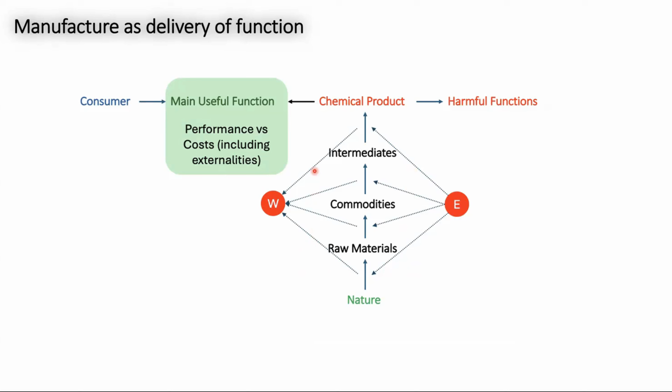And in recent years, the design vector, the set of target properties for manufacture, has significantly expanded. So this is a typical statement from a customer of what they want to have. For example, they want to make a new material with a particular property X, whatever that is. They want to make sure that there is no patent infringement. If this material goes into the end of life in the environment, it needs to be biodegradable, it needs to be non-toxic, easily manufacturable, having a low-cost starting material. Those materials should have a low environmental impact, and the overall process should be cost-effective.

This is a 7-dimensional design vector, which is really, really difficult to hit. And so the way we design materials these days, the way we manufacture them, is rapidly changing because of the need to hit a significantly more complex design specification for materials and molecules.

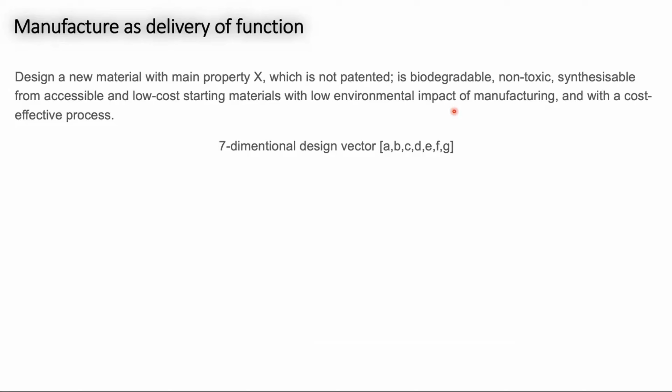We do manufacture in systems. The manufacturing plants are collections of unit operations. They are in specific order. They interact. And so what we have as a manufacturing process is a complex system. Because this is a complex system, those are quite difficult to create. And the degrees of freedom in the final manufacturing process are relatively few. What we note is that the globally optimal way of manufacturing is usually a sequence of suboptimal units. If we optimize each step individually and put them together, that doesn't work. We really have to optimize the whole system together.

And now, as we have this wider design vector for materials, our global optimization is now even bigger than just the operation. We also need to take into account the environmental impacts, the supply chain, and so on and so on. So this really is becoming harder.

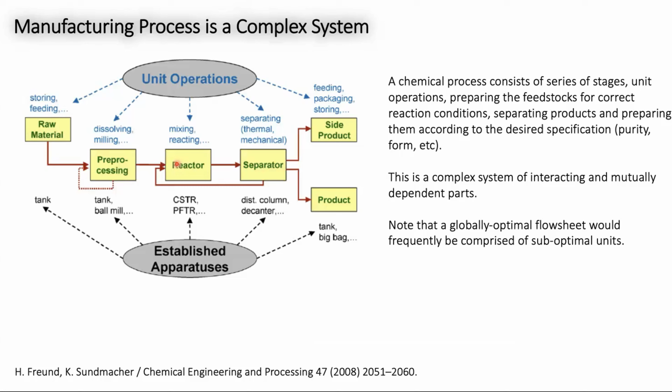And just to show you the last slide, which shows that this is difficult, is the scale and the dynamics of the process. So if we're looking just at the manufacture, we have a process. A process is a collection of units. Let's say we have a reactor underneath that. Within the reactor, we'll have certain phases. Each phase consists of molecules and consists of atoms. So we have this hierarchy of scale, and then it's also in time. So we go from the starting materials, which are placed into the plant, into the products.

The products are typically either materials, so phases, combination of phases, or a combination of phases and molecules. And then these are the products, and then in the use phase, we have this combination. So it's quite a large collection of different scales. And in order to cover the science of this, we cover a lot of different disciplines. So technically, this is not an easy task to put this together.

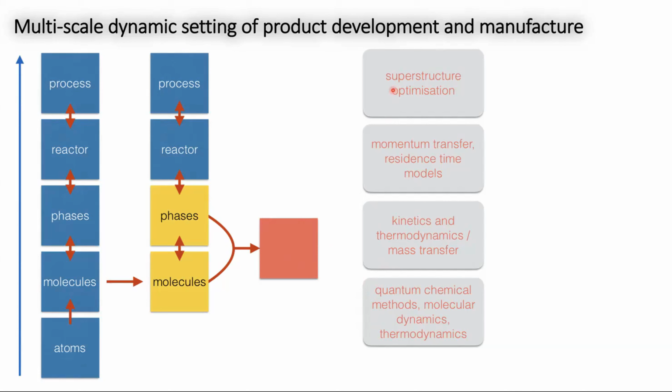So now we're talking about process design using new tools and then process manufacturing using emerging tools. So what we're trying to do is combining the knowledge about unit operations. So what do we know about this? What are the tasks? What's inside? What are the conditions? What's the physics and chemistry inside? To create a first principle model.

The first principle models are our summary of our understanding of what's going on. It may be slightly wrong, it may be simplified, but that's what we understand about what's there. It's a research tool, and the first principle models are also used in optimization and control. We can collect the operational data from the running of the plant, and then that gives us the statistical models, which can be used also in control and optimization. It also can lead to tasks such as anomaly detection, fault detection, and so on.

And then if we combine the first principle models and the link to the operational data through sensors and the feedback to the actuators in the plant, then we have our digital twin. And so in this case, we can start talking about digital laboratories, digital factories, tasks such as real-time optimization, predictive maintenance, anomaly detection, etc. So I'll show you how we build these things, how the technology evolves and what's under the hood in developing this type of technologies.

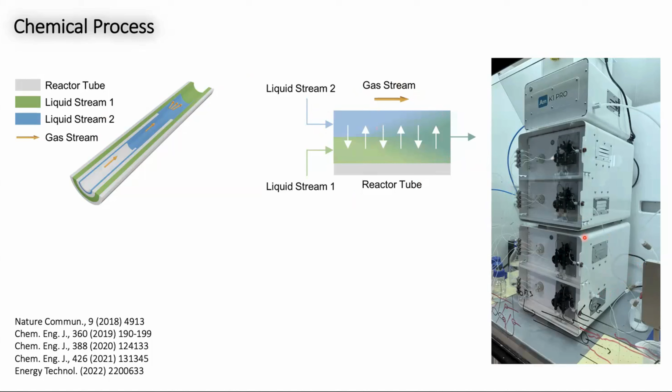Again, they're not very specific about what's going on. We can start picturing the phenomena which are in this process. And then we have the actual plants from which we can collect the data. So there's a lab plant with sensors, which we then can use to collect the information.

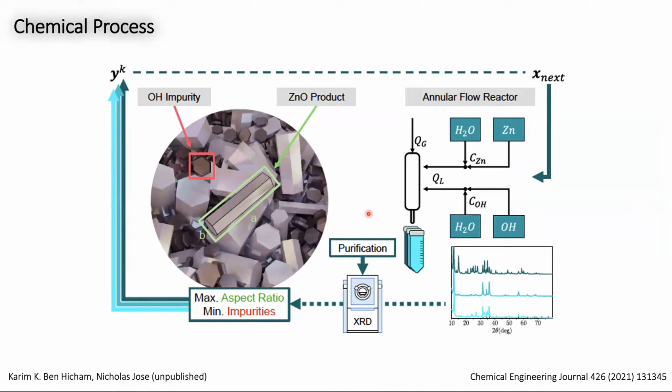So in process development, we're trying to optimize the product. So in this case, if we are making zinc oxide, we need a particular type of crystals to perform a specific function. We are creating these loops for optimizing the operating parameters, which are the concentrations, the flow rates, to have the specific properties. You can do it manually, but you can also put this into a closed loop optimization system. So closed loop optimization systems these days are very popular.

You have an experiment which is either manual or fully automated, where you need to automate not only the experiment itself, but also the analysis of the outcome. So whether this is a crystal structure, whether this is some other property. And then you have an intelligent algorithm, typically Bayesian optimization is being used here, to design the next one or a sequence of experiments to perform.

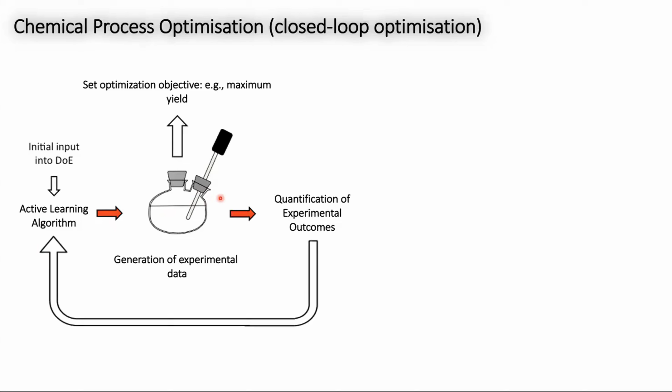And if this is fully automated, then you can run it as a closed loop and you don't need human intervention. It could be partially automated as well, when the human operators can enter the data of the analysis into the system to then run the next experiments. Accelerated Materials have created a product for this. It's called AM-Learn. So this allows you to automate third-party equipment and run Bayesian optimization if you want to have a look at this version of Bayesian optimization.

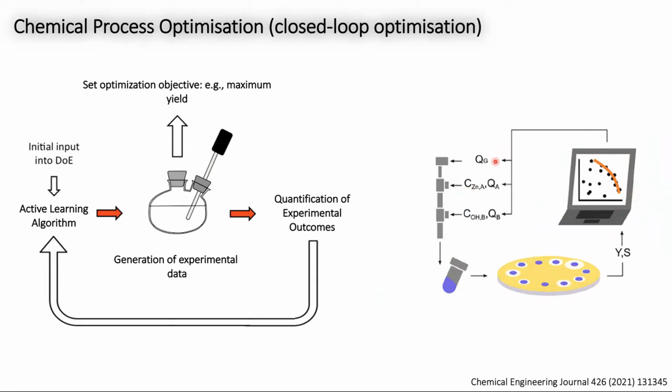So let's say we are optimizing the zinc oxide for its antimicrobial activity. And in this case, our analysis is the disk test with microbial cultures. And looking at these results, we feed them back into the algorithm and then optimize the conditions. We run this campaign. It's run as an active learning loop. So there is an algorithm here, which is called TSEMO. The current version of AM-Learn has a more advanced algorithm than this, which then suggests the new experiments. The advantage of doing process optimization with these kinds of systems is typically the reduction in the amount of effort you need to do.

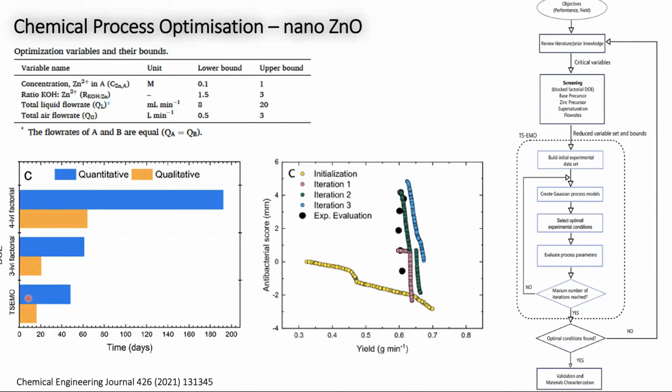So this is a comparison of achieving the results with this TSEMO algorithm compared to classical factorial designs, and the TSEMO allows to reduce the experimental effort. If you do it with experimental design, this is even better compared to the manual operations. So in the lab scale, the use of the digital tools, when you have an equipment which is automated with the machine learning codes, allows to speed up the development of the products.

So this is the statistical model. So we collect the operational data, analytical data, and develop a statistical model. So now that's not enough to build a digital twin. We prefer to also have a first principle model, and you will see later why we want to do that. So here's our problem statement. We would like to have first principle based models, but the model development is quite a difficult task. It requires a very high level of expertise.

You need pretty much three people. You need a subject matter expert who knows the science of the problem. You need somebody who really knows how to use the tools for design. Typically, people use commercial tools. And you need somebody who really knows the modeling problem itself, because identifying the model calibration is not a trivial task. So this is sort of a three-man job. There are very good individuals who can do the whole lot themselves, but typically this is more than one person.

So we're asking the question, is it possible to automate model development, making use of the existing knowledge of science and engineering, which is domain knowledge, existing knowledge of process systems engineering, which is how to correctly identify, calibrate, model, and design of experiments, with reasoning capabilities of AI. So this is then another application of artificial intelligence.

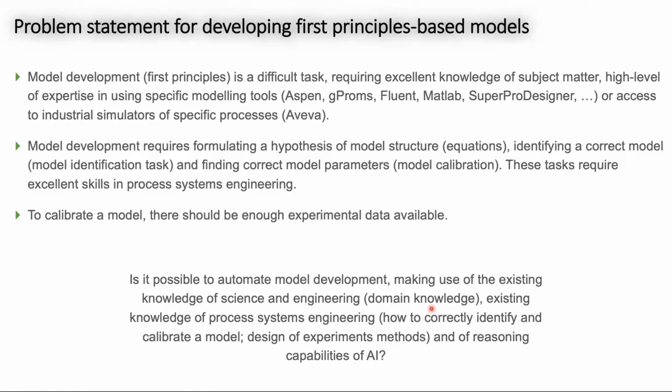So what we are ultimately building is the connection between our experiments, whether this is a lab scale. Initially, it's a lab scale, and then later I'll show you also the plant. With the knowledge base, we're going to use the technology called knowledge graphs and explain why, where we expose the process data, the physical models, and the AI models in the agentic way, so that we can do things like simulating the process, identifying the model, calibrating the model, and optimizing the processes. So that's our target.

Now, in order to develop this, we chose the technology called knowledge graphs. And the knowledge graphs allow us to achieve three simultaneous tasks. Expressivity, so everything is semantically annotated, so we know what's going on. All the models are highly interpretable. Everything is standardized, which means that we can use multiple tools, multiple different vendors can access the same technology and so on.

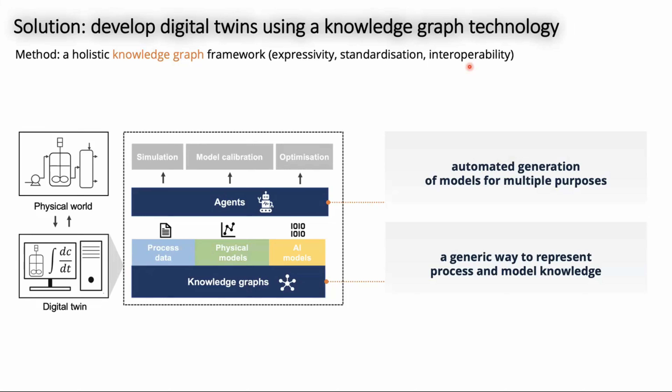And interoperability, which means that we can connect multiple domains, whether this is making materials or making molecules, analytical technology, different types of plants, different types of manufacturing. These are technologies or the sectors which can all use the same underlying core technology if they are using the technology of knowledge graphs.

Now, in order to do that, we have to introduce the language of the modeling and the language of communication within the knowledge graph. And that language is based on the concept of ontologies. Ontologies is an ancient concept. This comes from philosophy. It's also the foundation of computer science. Without ontologies, computer science, the way we have it today, and the AI would not be able to exist. Ontologies is a way of creating a consensus of the representation of knowledge. And that allows to share information across software systems, share information across technical systems, and so on.

Within the ontologies, we define the language. How do we communicate? How do the instruments communicate? What do we know about our systems? So we define things like classes. So what are the entities? What exists in our universe, in our understanding of systems? We define specific entities, the instances of members of the class, their relationship. This is the most important bit, how things relate to each other, as well as ground truths, some propositions that are always true, which allows us to calibrate against the most foundational statements.

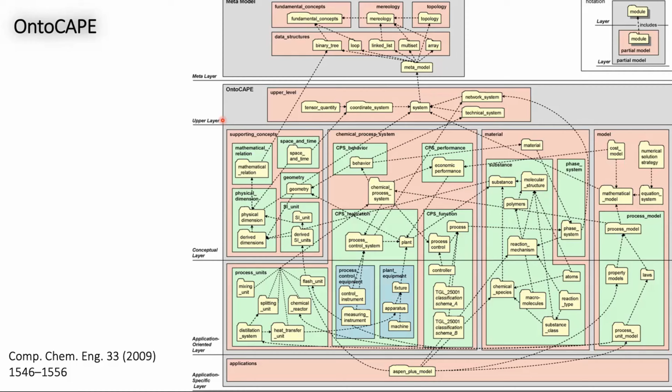So how does it link to chemical processes, and how does this link to the technology of developing models? What we've developed recently is an extension of the process ontologies, where we have an ontology of the model. An ontology of the model describes what a model should have. A model has a certain physical law. These laws have variables within them. The variables have symbols and units and dimensions.

The laws have a formula, the final way this law is expressed in mathematical language. Sometimes they have a reference. So if the law was developed by a particular person and you have an equation published, then there is a reference to that publication. Then these laws correspond to specific physical and chemical phenomena.

So what we do in this ontology, we quantize the complex expressions or the complex physical laws into the underlying phenomena. Some of the laws are very simple. Each one of Newtonian laws is a single phenomenon, but some may be more complex. You can have mixing together with heat transfer, you can have a reaction together with mixing, but we just describe them separately so that we can recombine these phenomena in different ways. So this is the first ontology, which is the ontology of the models.

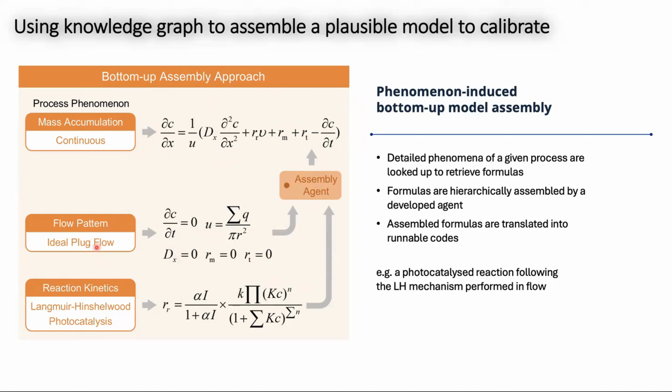The expression says the user selected that they have an ideal plug flow. That means that the expressions for the mixing terms are specific. That means that there is no dispersion in the system. So some of the terms which go into the final equation of mass accumulation are then zeroed. And so the final equation for mass accumulation, which is then a physical model, is assembled from the underlying phenomena which are selected by the user.

Sometimes the users don't know what exists in the process. They have the data, but the technology is quite complex, and the user may not necessarily know exactly what phenomena to choose. So in this case, we use a technology of process context, which is the six-dimensional descriptor, looking at structure, space, energy, substrates, information, and time, to assemble plausible models for a specific system, and then do the process which is called model identification: which of those assembled models are most likely to correctly represent the physics of the process or the data which is assembled.

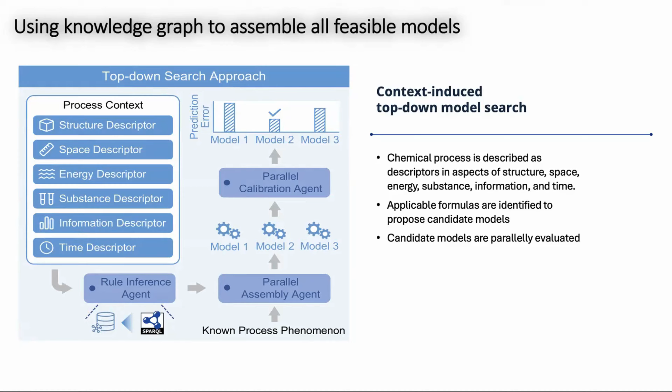So for the case of the accelerated materials reactor, the same reactor I've shown you before, the model will assemble what's the flow pattern, what's the mechanism for molecular transport. We're using this reaction, which is a standard reaction, to characterize mixing behavior. It's very fast chemistry. Depending on the type of mixing, you will have different concentration profiles. So it's a very good indicator of whether you have micromixing or not.

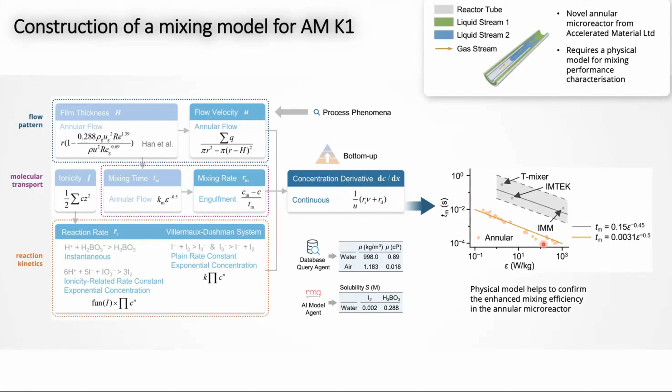Then this assembles into the final concentration derivative, and that allows us to simulate the reactor and also to calibrate it. So this is effectively an assembly of a first principles model, which can later be calibrated against a specific unit, which gives you a digital twin for that unit. In the case when we don't know the model, we did it for a different reactor.

This is a Taylor-Couette reactor, where the nature of the model changes depending on the operation of the reactor. So here the central cylinder is rotating, the wall is static, and the mixing behavior depends on the combination, on the interplay between the rotation of the cylinder and the rheology of the fluid. And so if you change your operating conditions, you may go from one type of model to another.

So here we assemble all possible models. So there are multiple models which could coexist, and then calibrate all of them. And we see that in specific conditions, different types of models are correct. And so that allows us to then see, okay, you actually need to go from one version, one model to another model in your digital twin.

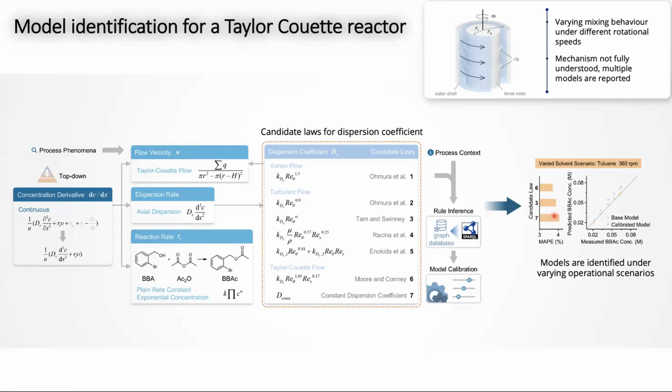So this technology has been developed to the point when we've transitioned this work from academia, from my research group at Cambridge, into another of our startup companies called Chemical Data Intelligence. This is now a product. It's going to go on the market in the next few months.

So now, okay, we have a first part of the digital twin. I already talked about two parts of the digital twin. We can assemble statistical models through active learning loops from operational data. We can also now assemble physical models using this knowledge graph technology. So now we're trying to create a full digital twin.

And in this case, what we're trying to do is to take data from a pilot plant, in this case the Accelerated Materials pilot plant, and link it in the full architecture for a digital twin. So we combine the physical model of the part of the plant with the statistical model built on the data coming from the plant, and we're putting it into the overall architecture. We did this for a subset of the plant, and we were demonstrating this in the public project with Accelerated Materials giving us access to some of the data from the plant.

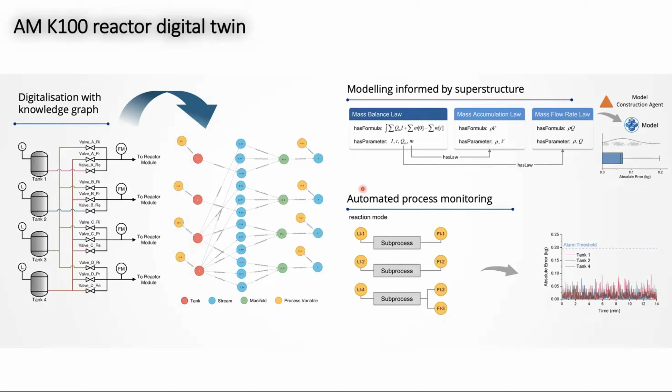So what did we want to illustrate, and how does this overall architecture work? I'm going to spend a bit of time on this slide. So we have a plant. There is a physical device. A physical device, of course, requires certain security. So we need to make sure that there's no possibility of hacking the signal if the plant is running and we are collecting real-time data from it, sending it to the cloud environment or edge servers where intelligence is being collected. So here we might have historical data sitting on the plant in the local servers.

We have a test server here. Then we have an edge virtual machine. This is a server which was run by the institute. I2R is the A*STAR institute in Singapore. It's now called differently because it's just merged with another institute, but a few years ago it was I2R. Here there is data processing, and the data is enhanced. The raw data is semantically enriched and sent into the correct data storage. The data storage is on the cloud. We use the Microsoft platform Azure.

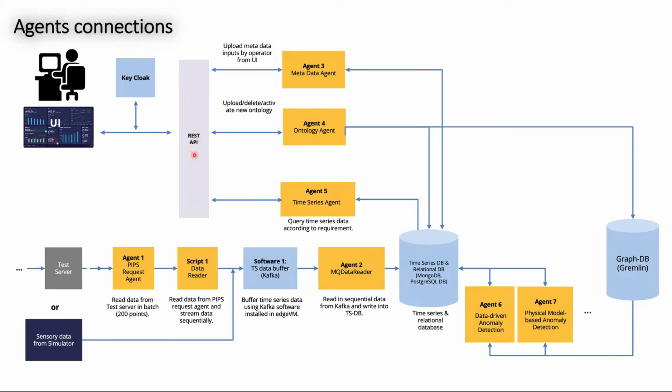For the anomaly detection, we have created a specific workflow when we asked how best to make use of both the availability of the raw data coming from the plant and availability of the physical model. So effectively, we are having two parallel models running together, or you can run them separately. The physical model is what you believe the plant should be able to do. It doesn't have the connection to the actual sensors, but it's calibrated on the plant data. So it should give you a reasonably good description of what you should expect when you're running the plant.

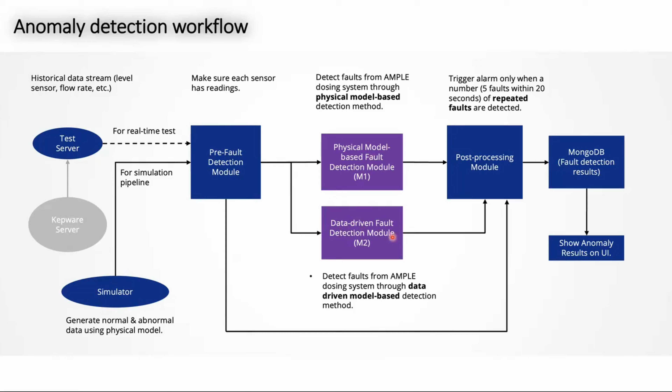Whereas the data-driven model has access to the historical data as well as the real-time data. So what you can do is you can run both of those together, and you can see when the plant deviates from the predictions of the physical model, when the plant deviates from the prediction of the statistical model. And then that gives you an indication that you do have a fault in the plant.

For the anomaly detection, the physical model, I think I have a more detailed slide of this. Also, the statistical model was built on the autoencoder architecture. So you normalize the data, you train the model, you compute the error, then you detect the operational stage, you identify what are the most erroneous parameters. If the errors are exceeding the threshold, then you have a decision making what to do, whether this is a normal operation or whether this is a flag which is given to the user.

The physical model is: you have the data, you query the ontology, you configure the model, you calculate the errors with the configured model, and then you see, okay, are you exceeding the threshold or not? So again, this works with the specific data architecture. So it makes sense to just show you a little bit more detail here. The graph data is the ontology.

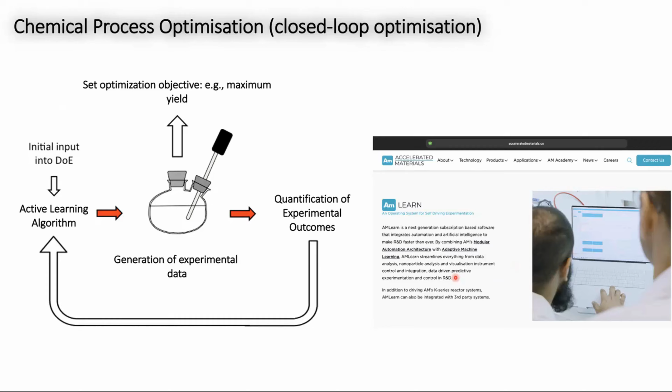And the last question for today, does this digital twin require cloud storage to run, or can it be run on local systems or servers? So this will very much depend on what an organization's IT security is. Many organizations have local clouds, so you don't need to be on the public cloud. We used Azure or Microsoft simply because many organizations know what it is.

We don't have particular affiliation to this or anything else. We could choose anything else. We could choose Amazon, we could choose Big Blue, doesn't really matter. So if a company has a local cloud, which is not connected to the open public internet, that's more secure. However, you can make it also reasonably secure with the large cloud providers such as Azure or AWS. Those tools exist, and it's an internal choice of an organization.